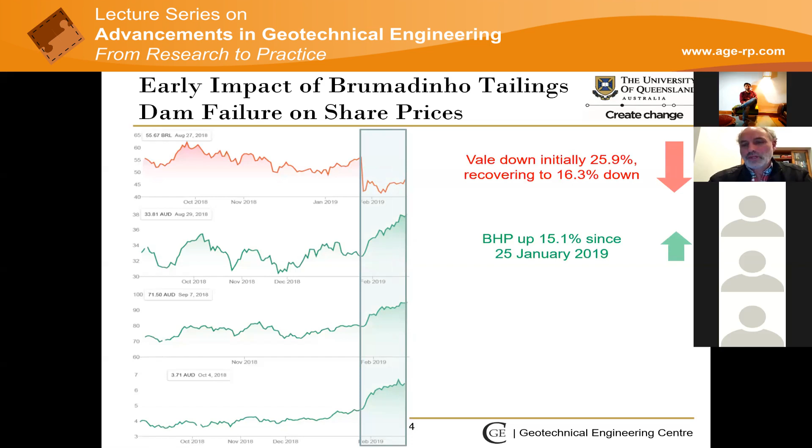It's also, I think, telling to look at the early impact of this failure on share prices. I'm looking just at the last month, or the month following the failure. I've got Vale, and then three other global iron ore producers: BHP, Rio Tinto, and Fortescue. Vale is dominated by iron ore, but it has some other interests. Rio Tinto likewise. BHP has a lot of other interests apart from iron ore. Fortescue is a purely iron ore play.

You can see that within about a day, the Vale share price was down about 26%. And it oscillated a little bit after that. These little peaks and troughs are not based on sound analysis - they're just gut feel on the part of the market. The market obviously thought it got low enough, and then there was a bit of a buying splurge before it went back down again.

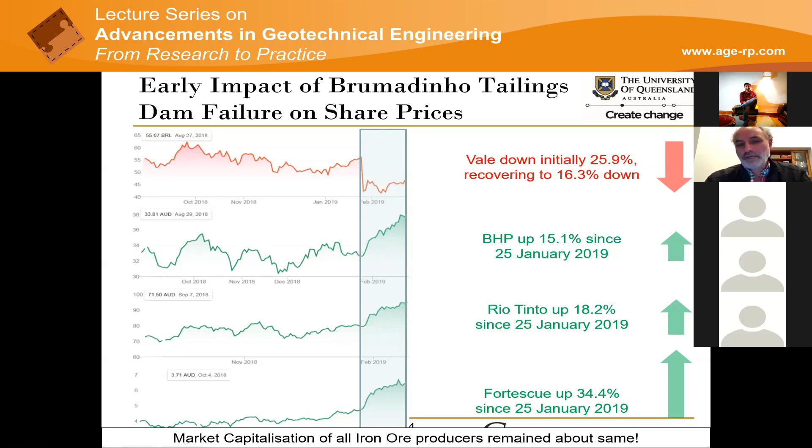That's just the first month after the failure. What's good about this is that nothing much else was happening at the time, so these changes in share values of these various companies, all connected to iron ore, are a true reflection of the impact of the failure. Notice that while Vale went down in about a day, the others took a few days to start picking up and just continued to go up. Essentially the market capitalisation of all these iron ore producers remained about the same - so Vale's loss was the gain by the others.

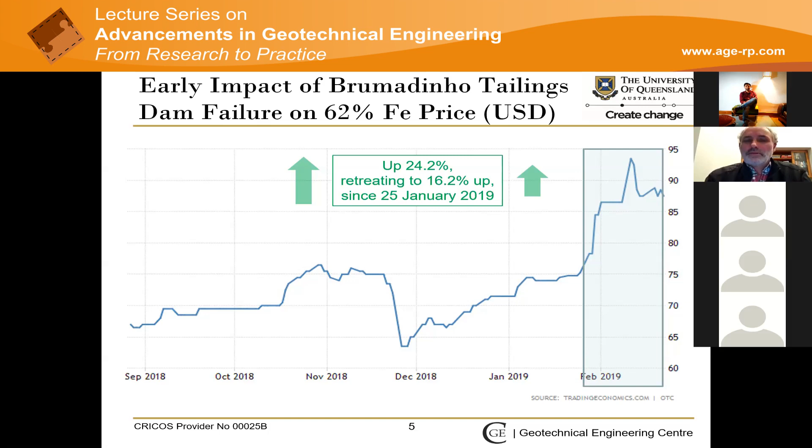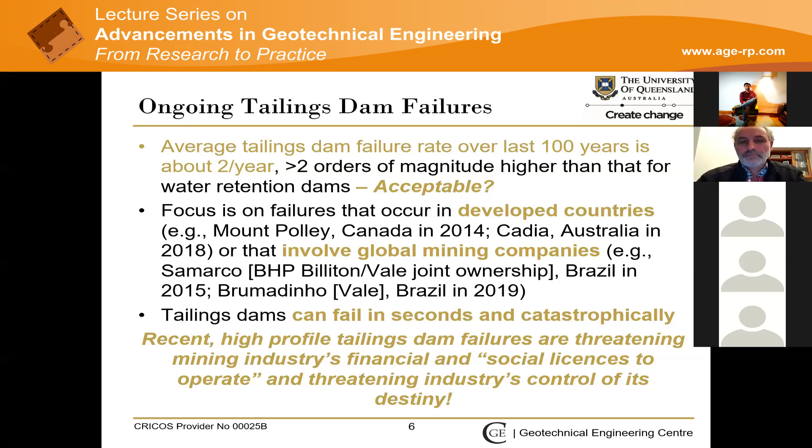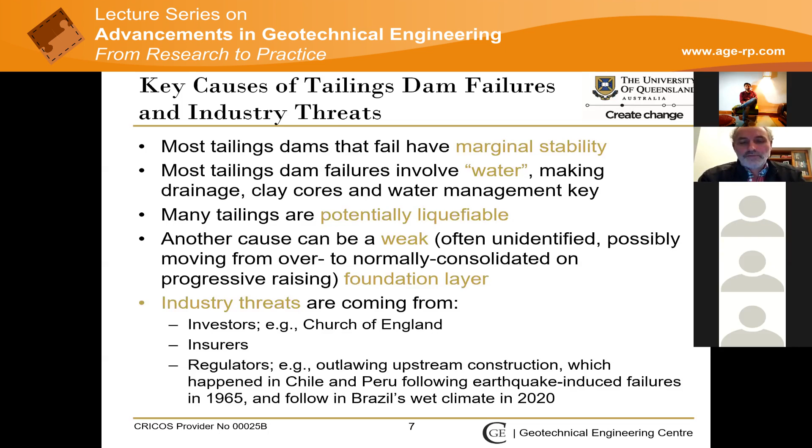And the regulators. So for example, outlawing upstream construction, which happened in Chile and Peru following earthquake-induced failures in 1965, and it followed in Brazil's wet climate in 2020.

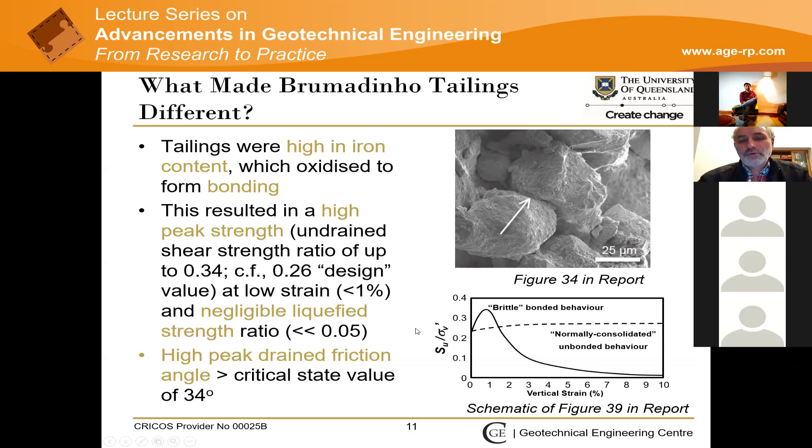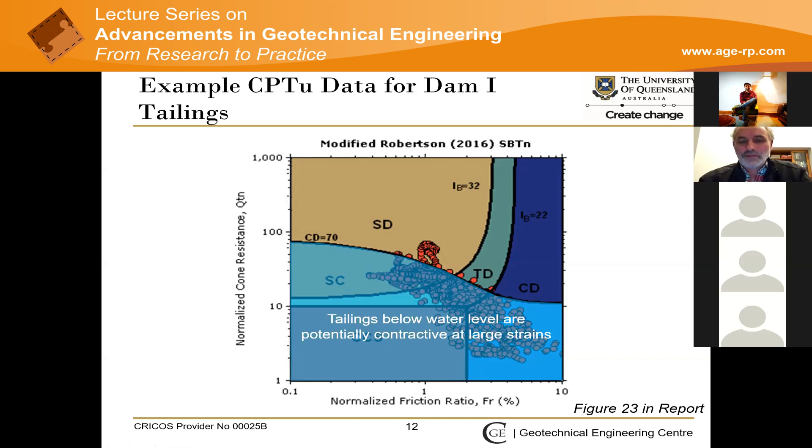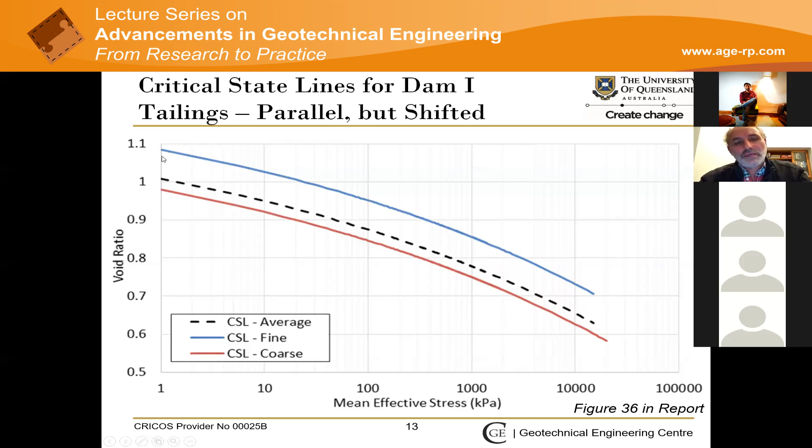But it turned out to be important to differentiate between these three gradations because there's quite a range of void ratios. So, monitoring and the failure. Because of the Fundão failure about 3 years earlier, also in Minas Gerais, there was a lot more monitoring, in fact a lot more investigation of the Brumadinho site than there would have otherwise been. So they had piezometers, but piezometers are often slow responding. So if you calculate how long it takes for a piezometer, a standpipe piezometer to respond, it's minutes in sand-sized tailings, it's days in fine tailings, and it could be about a month in the slimes end of the beach, at the far end of the beach.

So they were replaced. They were originally just open standpipes that were dipped, but they were replaced with vibrating wire piezometers, still in the open hole. So their response time was still relatively long, depending on what material you're in. They were automated prior to failure, but there's a relatively short record of automation, and the frequency of readings was not all that close.

But they did show a slow lowering in the phreatic surface within the tailings. Now, the tailings had ceased to be deposited about 3 years earlier. But the lowering of the phreatic surface was only about a metre in the 3 years or so post-deposition. The cone data were used via the water pressure dissipation to give an idea that it was actually non-hydrostatic, because there was seepage coming out of the face, which drew the pore pressure distribution down with depth.

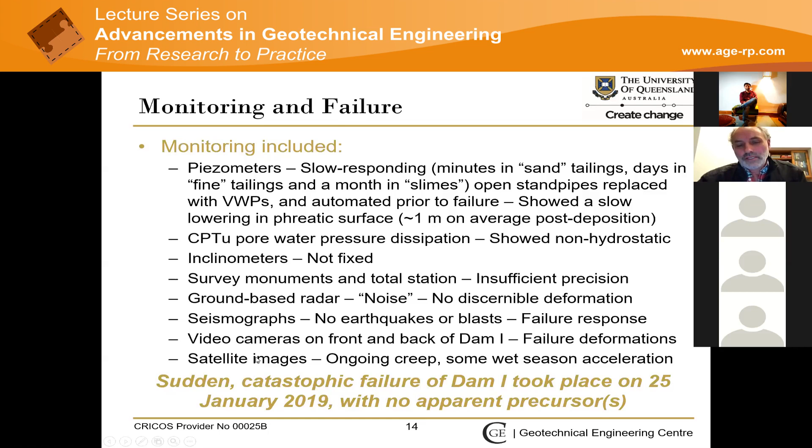And the failure was sudden, catastrophic, with no apparent precursor. So none of these monitoring devices gave a definitive precursor to the failure that was about to occur. Probably the closest that came to it were the satellite images, but they weren't analysed until after the event.

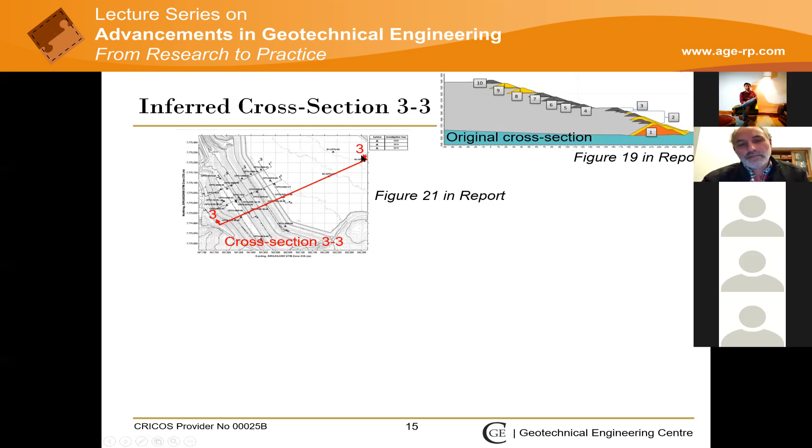So the expert panel decided to change somewhat the sections that were analysed. Some of the sections they had were actually not straight lines, but had a kink in them. So we looked at these three typical cross sections, and section 3 was the critical one of those, and it looked like this. These layers were inferred from all the data we had available, mainly cone data, a little bit of aerial photography as well.

So you can see the raises. You can see the yellow is the coarse tailings, the orange is the fine tailings, and the red is the slimes further back. Now they appear to sort of truncate very rapidly, but that just reflects that we had data either side of that point. We arbitrarily decided to truncate those layers, but in fact they would feather out in reality.

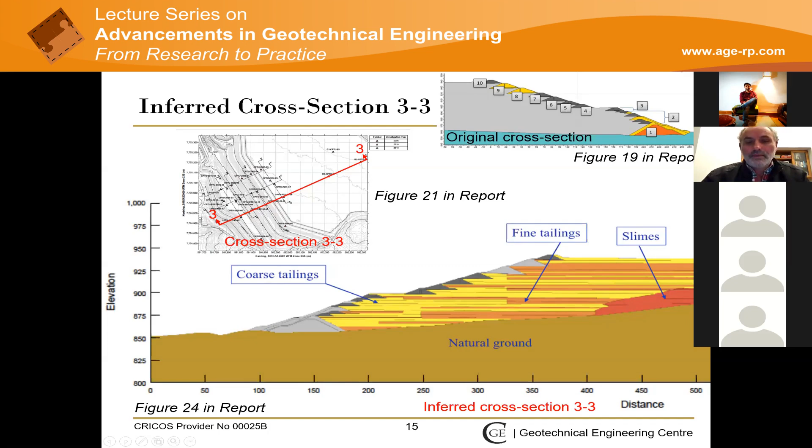There were some potential technical causes of the failure that were discounted. There was drilling for deep horizontal drains, the idea being to try and lower the phreatic surface further. They put in 3 horizontal drains at the upper level, 9 at the setback, and 3 towards the toe.

One of those, deep horizontal drain number 15, went through the starter dam. It was put in 7 months before the failure. It resulted in the emergence of turbid seepage 15 metres from the hole and about 7 metres vertically up from the hole, so that's 70 kPa, accompanied by a rise in nearby piezometers.

There was a seismograph response to this localised failure, with measurable deformations and relaxation of the dam face. But it happened 7 months before the failure, so we can't ascribe the failure to this. There were no earthquakes or blasting.

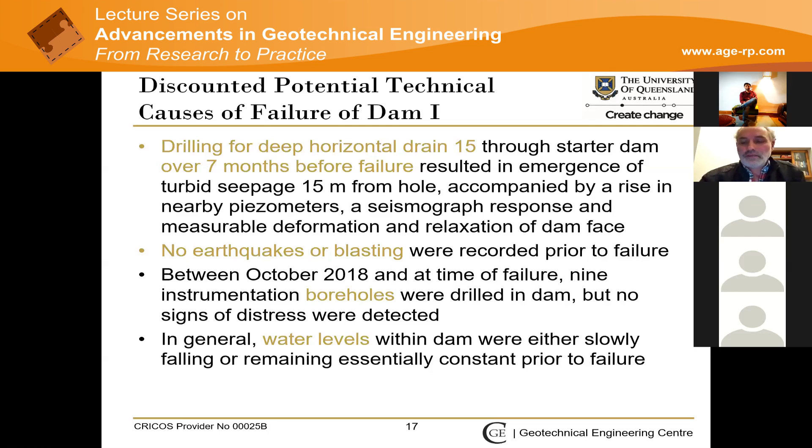So the technical causes of the failure: first of all, Dam 1 was marginally stable. In simple terms, it was oversteep and too wet. About half the volume of this dam was water—half the volume, not the mass, but half the volume was water.

There was a sudden strength loss and resulting failure of this marginally stable dam due to a critical combination of ongoing internal strains due to creep and a strength reduction due to loss of suction in the unsaturated zone above the water table, caused by intense rainfall towards the end of 2018. This followed a number of years of increasing rainfall and intensity after tailings deposition ceased in July 2016—about 2.5 years before the failure.

The calculated pre-failure strains from this combination of triggers match well the small deformations of Dam 1 in the year prior to failure that were measured and calculated.

It's also important to note that conventional limit equilibrium analysis assumes all points on the slip surface are at the same state. If all points on the slip surface in this case had been at the peak of bonded strength, the factor of safety would have been of the order of 1.5, but it was actually closer to 1. The reason was that parts of the dam had already passed their peak strength.

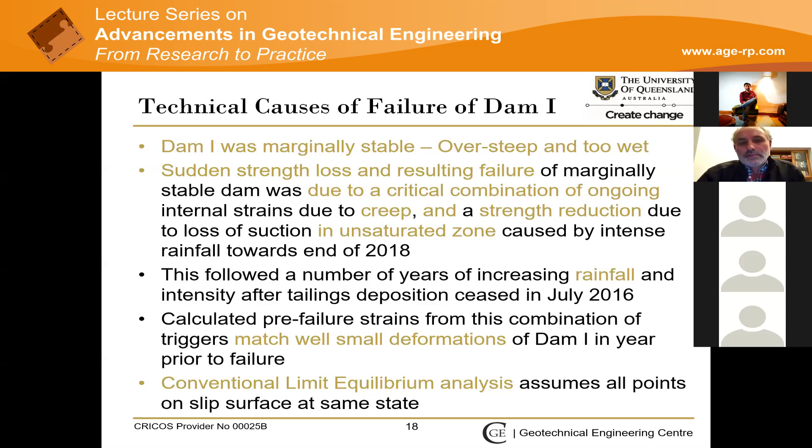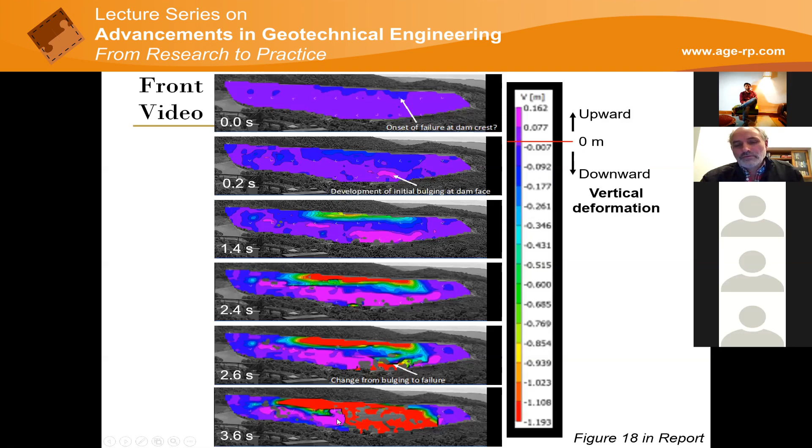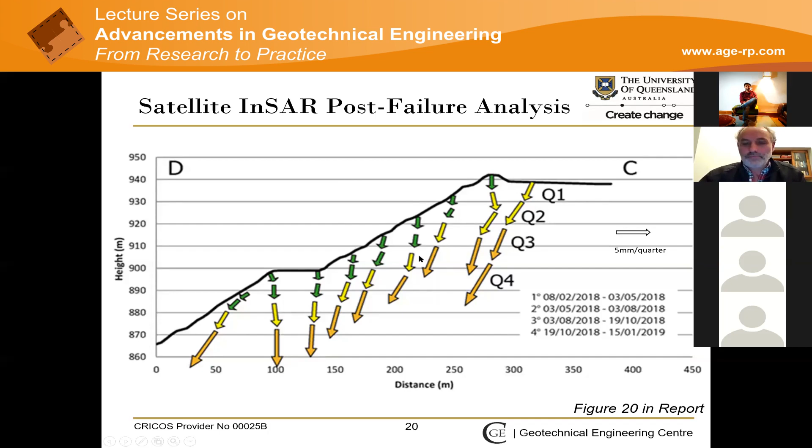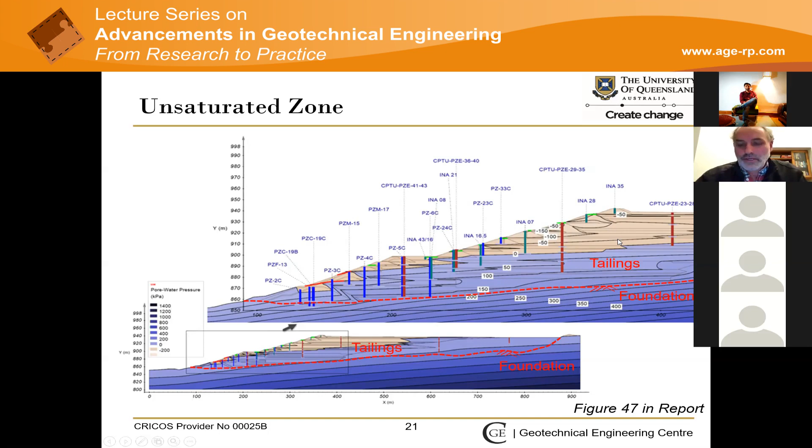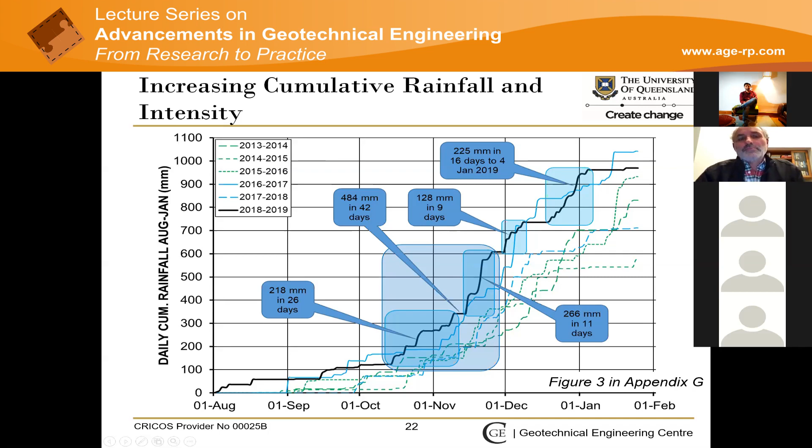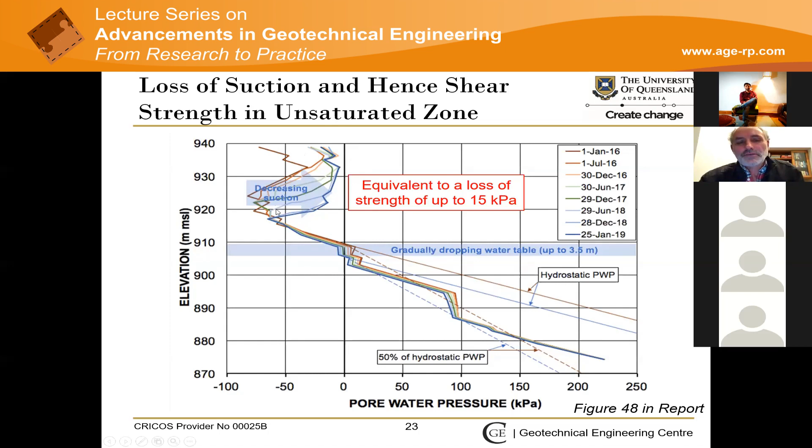So what's happening is the rainfall is infiltrating, causing the unsaturated zone to wet up. The unsaturated zone doesn't have sufficient permeability to let the water go any further, so it's not getting much below about that level - all this action is happening in the top 25 metres or so. And there's a disconnect between this unsaturated zone and the saturated zone below - low permeability unsaturated zone and the saturated zone below, a disconnect.

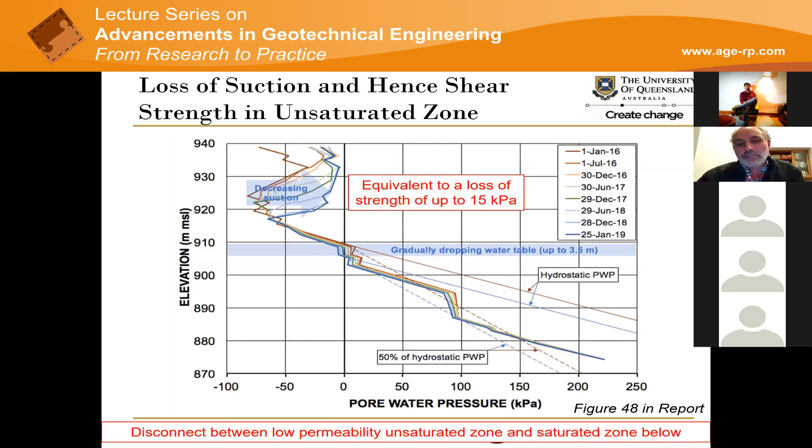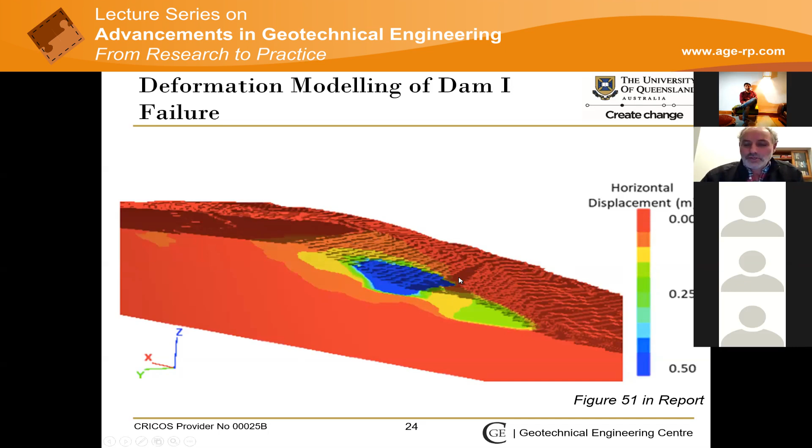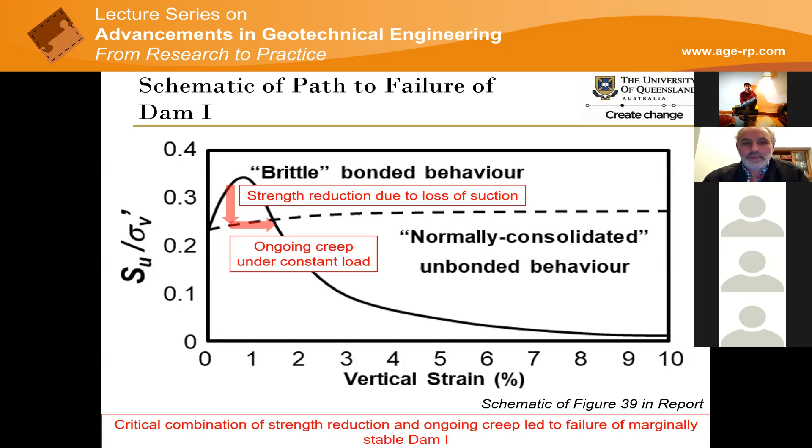Now I want to turn away from expert panel work to some general learnings and observations, then we'll open it up for questions. Some general implications of tailings dam failures for practitioners.

There's a loss of confidence and trust in tailings engineers. They're two different things: we're not confident that you can do what you're supposed to do, and we don't trust you to do it. That's going to take a long time, if ever, to restore.

Tailings engineers are in the front line when it comes to failures, and unfortunately there have been too many of them. It's not the bean counters, not the accountants in companies that dictate how much money is spent on different aspects of the mining business—they're not going to be held to account. It's the tailings engineers, the technical specialists, and some of the responsible line management people as well.

The ICMM, in collaboration with the United Nations environmental people and the Responsible Investor Group, PRI, has drafted a global tailings standard as part of their global tailings review following this failure. The link is globaltailingsreview.org. The intention is not to replace national or regional guidelines where they exist, but to complement them. It'll be interesting to see whether the global tailings standard becomes more accepted or whether national guidelines continue in their current form.

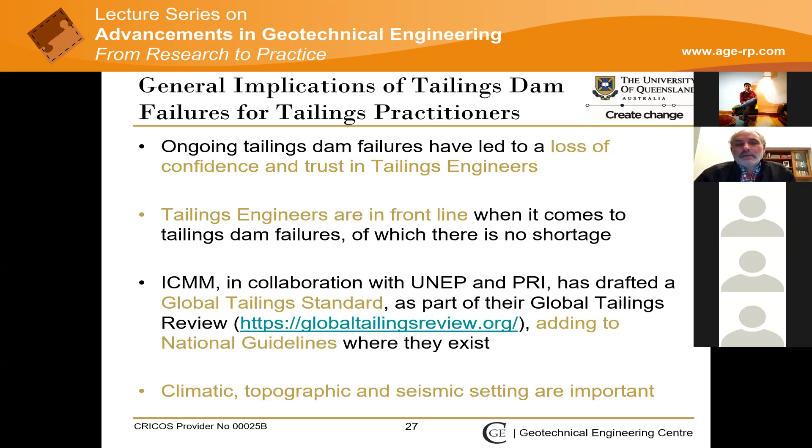So let's look at some responses and changes arising from these well-publicised recent tailings dam failures. Firstly, Mount Polley, which was a foundation failure.

Some of the responses: the reinstatement of the tailings dam. They decided that they'd investigated the failure so well that they knew more about that site than anywhere else, so it was sensible to work with that site and raise the dam at that location, putting in a buttress for stability.

There's been what I'd call persecution of tailings engineers by some of the authorities that govern engineers and their work. It's become quite personalised, not the way it should have gone perhaps. There's been ongoing legal actions against the company, engineers and the government, all of them being blamed in different ways.

Some of the changes that have occurred as a result of Mount Polley: there were audits of all the tailings dams in British Columbia. They identified about six with insufficient information to confirm their stability. That extended to the rest of the dams across Canada, and there have been company audits worldwide.

Fundão, a liquefaction failure. Prosecution of tailings engineers and executives, which was dismissed—they were initially charged with murder. There's been remediation of the site and downstream impacts, a lot of work and money spent. Ongoing legal actions against companies and governments will go on for a long time.

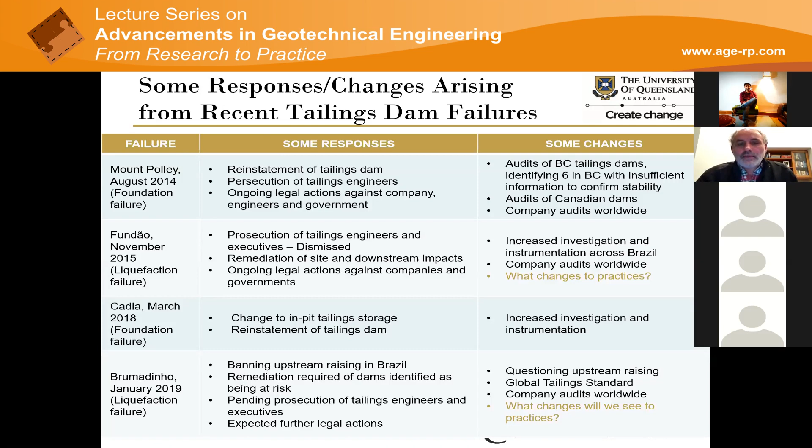Now, I want to highlight this, a couple of plots actually. Because we work in terms of factor of safety, but perhaps we should be working more towards annual probability of failure, or some probability of failure. So this is a plot of those two, and if you had to come up with a unique point, a factor of safety of 1 is essentially a probability of failure of 50%.

But on top of this, superimposed are these coloured lines for poor through the best construction, design and construction. Let's see what that means. When the factor of safety is 1.5 and we have poor design and construction, factor of safety might be 1.5, but the annual probability of failure is about 1 in 10, clearly unacceptable. On the other hand, if we had best design and construction, the sort of thing we typically do for water dams, the factor of safety again were 1.5, we end up with an annual probability of failure of about 10 to the minus 6. Of course, it's the log scale.

10 to the minus 6 is the value we normally assume is acceptable for air flight. 10 to the minus 5 or thereabouts is what we normally accept for travelling in a car, particularly if you're a passenger, so it's involuntary. If you're a male driver, then we'll accept probably a higher probability of failure of 10 to the minus 4 because we think we're invincible. For dams, for water dams, it's about 10 to the minus 4.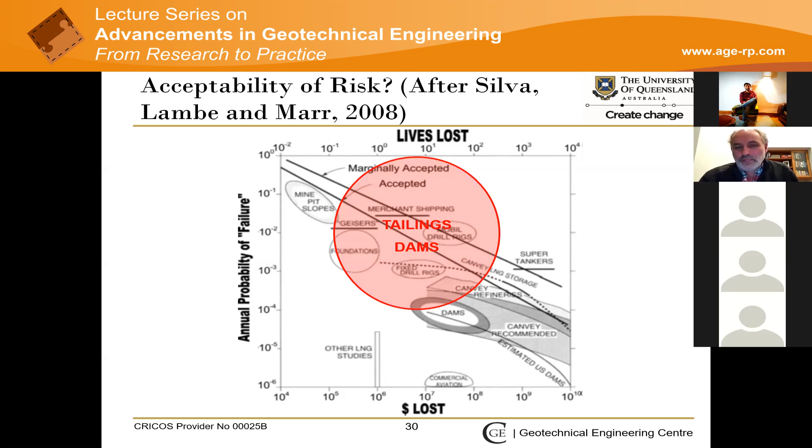So some of the emerging tailings dam surveillance methods, and at the moment, none of these would necessarily give you a precursor to failure. But among the methods, we've got drone surveillance that's coming more into its own. It's used to aid visual inspection and LiDAR, which is essentially laser from the air. We've got nested grouted vibrating wire piezometers to record and analyse the phreatic surface and the hydraulic gradient, but in real time. Because they're nested, you can get the actual hydraulic gradient.

Settlement monuments and fixed inclinometers, they need to be fixed in the foundation so that you're getting a real measure, not just a relative measure. And that would be for correlation with radar and satellite, but they must be high resolution. You've got LiDAR above water and bathymetry below water for estimating the tailings dry density and evaporation. You've got ground-based radar, but you've got a potential noise issue. Satellite radar, still radar, but it's of a longer wavelength and not so sensitive to moisture. And it's also taken at distinct time intervals with gaps in between, so you don't get quite the same noise.

And it can be more accurate. It's quite amazing that satellite radar can be more accurate than ground-based, given how far away it is. It also picks up other things like wet spots and vegetation.

V-notch weirs to monitor flows, environmental monitoring, and then a couple of new things: fibre optics and smart geofabrics. These could be installed in the tailings beach or under upstream raises to give a better idea of what the interior of the tailings is doing, because if things have already moved within the interior, it's too late by the time you get to the face. Another possibility is microseismic monitoring, but it would have to be sensitive, close to the dam, and able to filter out other effects it might pick up, even a truck going past.

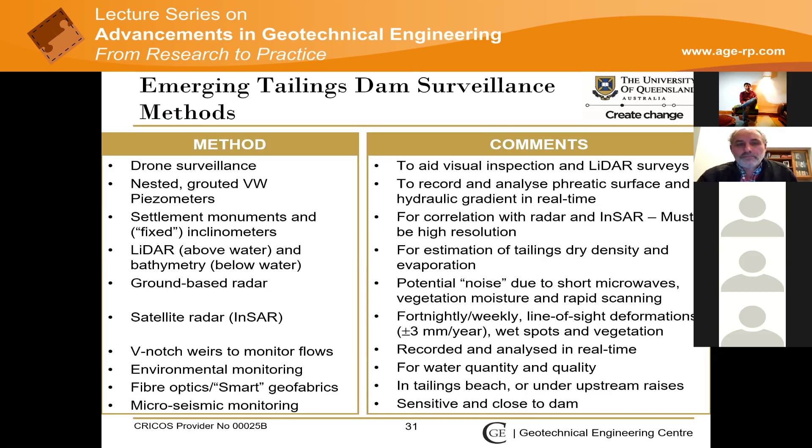So how would we monitor to ensure adequate stability and warning of failure? Above all, design, operate and close the tailings dam ensuring an adequate factor of safety or stability margin against geotechnical failure. Avoid, where possible, having people at risk downstream. Try to give them 24 hours notice, but at the moment we can't do that. Install redundant monitoring systems recorded and analysed in real time and linked to triggers and responses.

Daily inspections for wet spots, cracking and deformation aided by drones. Phreatic surface and hydraulic gradient monitored by vibrating wire piezometers, confirmed by regular CPTu testing. And for deformation, a combination of automated total station prisms, inclinometers, radar, InSAR, and some other things that are starting to develop, but we're not there yet.

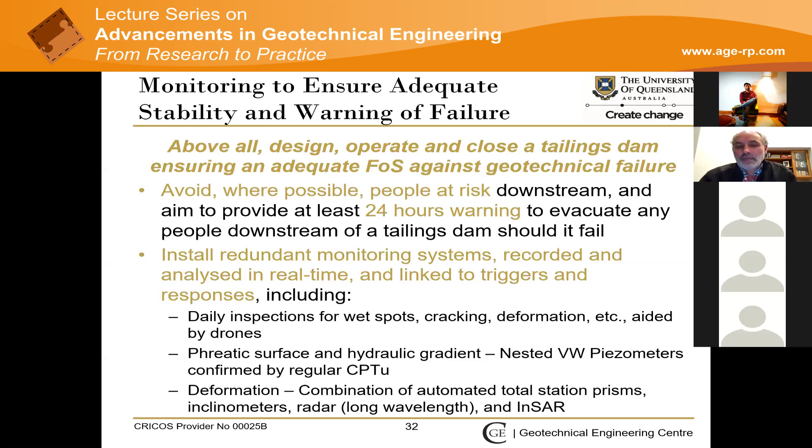Just to round it off, a couple of innovations in tailings management. On-off tailing cells: the idea of putting tailings into a cell, drying them and then harvesting them, using nature to dry them off before combining them with coarse waste. Thickening to the extent possible, paste disposal, dry stacking, co-disposal putting the tailings and coarse waste together, done in coal washery waste in the Australian Eastern coalfields from the 1990s.

Not always wonderfully successful, because they pump at low percent solids and high velocity, so you still get separation at the fines, ending up with a tailings beach beyond your coarse beach. Integrated waste landforms: can we somehow not mix but put the two in the same storage? Paste rock and geo-waste, which are both patented terms, haven't really gone much beyond trial stage - they're seen as too expensive. Tailings reprocessing and reuse: reprocessing in particular might be a cheaper solution than having a tailings dam that must be stable in perpetuity. But all of these things have limited take-up due to their perceived high costs.

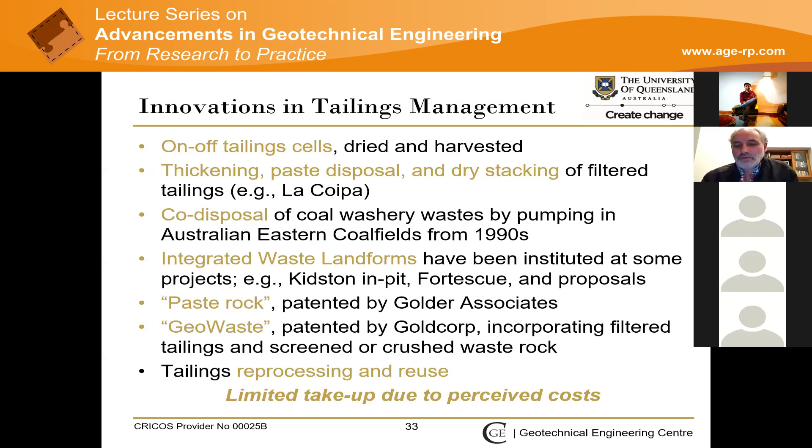So what are some of the barriers to these innovations? Net present value accounting and the use of a high discount factor between 6 and 10%, which favours tailings management that delays expenditure in the short term but is likely to exacerbate impacts and blow out rehabilitation costs in the longer term. The perceived high costs of putting in some of these management options. The perceived and real technical difficulties, for example tailings with high clay mineral content, or handling coarse grained waste together with tailings. And resistance to doing what we've always done, and uncertainty about new approaches.

And that's it. So, Partha, if you'd like to open it up for questions.

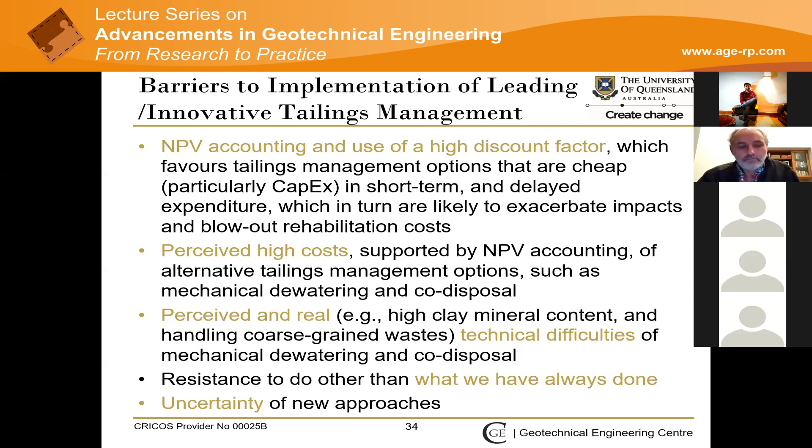He asked: you explained the CU was 0.34 and the drained friction angle was 34 degrees, which means that the tailing material could be categorized under medium dense to dense. However, you also mentioned the material is highly liquefiable in nature. How can we characterize the tailings material in this case?

Yeah, well the problem here is that while it might have a high undrained shear strength, it's not so much due to its density - that's an artifact of the fact that it's bonded or cemented. But bonding or cementing is very brittle, so if you have enough deformation to break it, and you don't need a lot because it's very brittle - less than 1% strain - then you lose all that.

And once you lose the bonding or cementation, the material reverts to its roots, if you like, and it's quite liquefiable - quite loose, quite liquefiable. Interestingly, the cone data showed this up too, but it's quite possible that pushing the cone into the tailings was enough to break that bonding.

So you're getting a true reflection of what the material would be like without the bonding. We're not talking about strong cementation here, just a small amount - some of the particle-particle contacts are bonded, and it doesn't take a lot to break them. Once you break them, the material is then dominated by its loose, or contractive, state, so they are liquefiable.